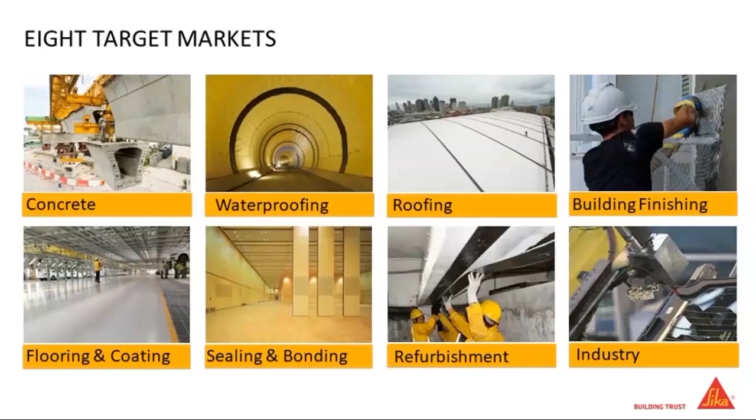So you can see we have individual specialists, but we operate as one to provide a range of support in our chosen markets. This graphic really just provides some perspective on how, as one supplier, we can really support most projects with detailed specifications, the products, the technical expertise, and the aftercare.

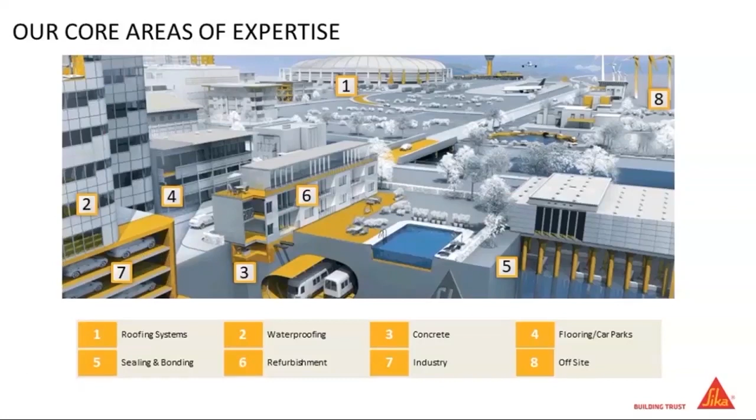So, as I said, let's move into roofing. Hopefully these market-leading brands are familiar to you and the technologies of liquid applied and single-ply membranes. And now also including the 4th pillar of bituminous systems.

Okay, let's now move through the project journey so far and a little about how recent acquisitions have helped us get here and why we choose to develop our range, including bituminous solutions.

So the first phase was to launch SikaBit Pro, our range of reinforced bituminous membranes. This was initially driven by demand in the market to complement our existing portfolio of single-ply membranes and liquid applied membrane technologies. It also provided more opportunities to match our customers' capabilities and their experience with multi-technology projects and our expertise in specification.

Launching SikaBit Pro gave the momentum to move into the next phase and to the introduction of a hot melt solution, ProMelt.

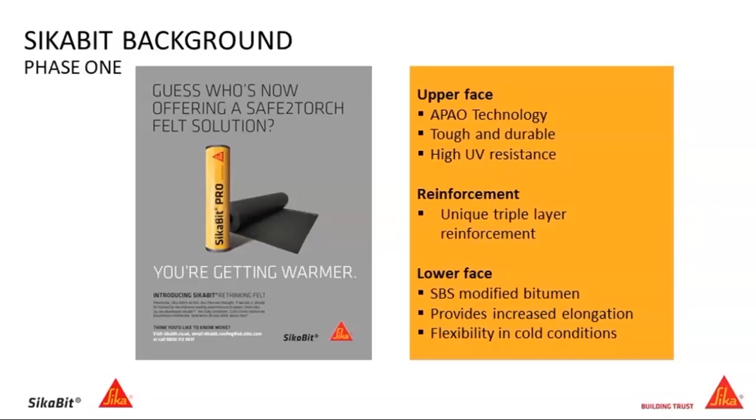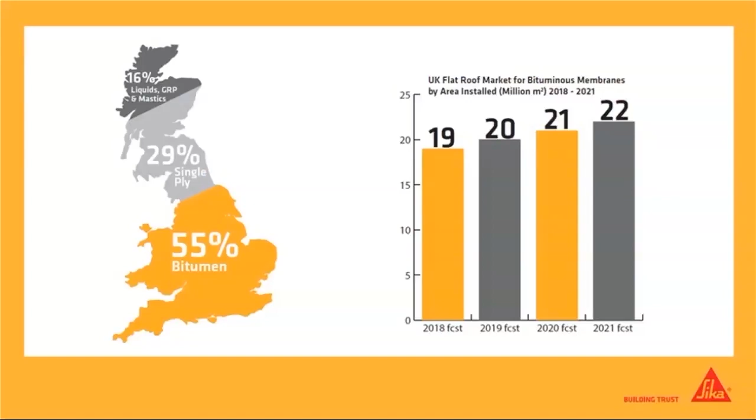Although Sika has historically pioneered the market in cold applied technology, there was still an opportunity in the mature RBM space. As this graphic demonstrates, that market share still accounts for over half of the flat roofing market. This position has been reaffirmed through the adoption of the Safe to Torch guidance across our industry from the National Federation of Roofing Contractors.

We're not strangers to bitumen roofing. For many, many years, our expertise across many countries has helped us grow. More recently, the experience acquired from these market-leading companies has allowed us to develop the solutions we focus on today.

We look at Bitbau Dörr, market leaders for over 40 years in Austria. KVK, again, market leading for a similar time in the Czech Republic. Index, who joined Sika in the last few years and boast the largest bituminous manufacturer in Europe. And more recently, Arcon in Romania.

This image gives a snapshot of our global presence for bitumen and where that experience has come from, whether it's product, specification details, or training and education. So with this wide range of experience, we could really complement our industry-leading liquid applied solutions and the range of single-ply membranes we're all known for.

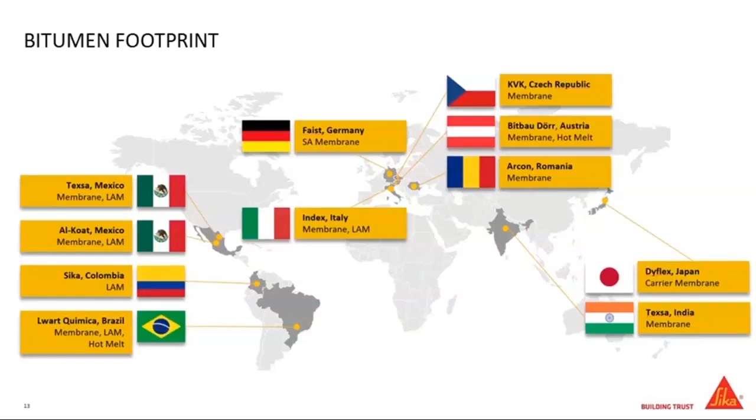Okay, hopefully this has given you all a little insight, and we can now look into the details of the products and services to support. So I'll now hand over the next section to Gavin and Fiona to take you through this.

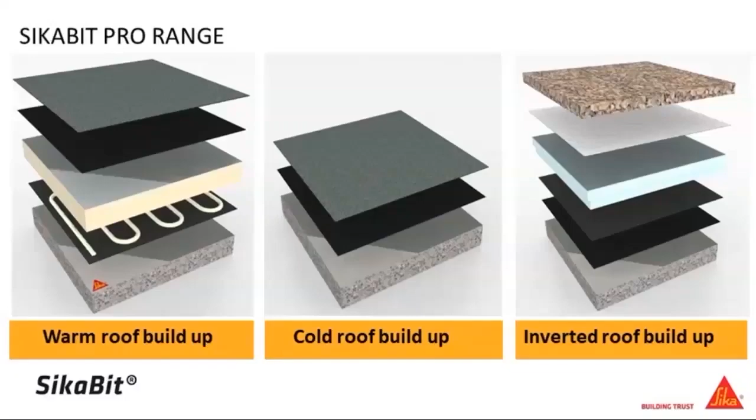Through the acquisition program that Rod mentioned, Sika has been able to benefit from the resource, expertise, and innovation that is available from the largest bitumen membrane manufacturer in Europe. This has given us a great opportunity to develop a range of systems using the latest technology and manufacturing techniques. Our range of SikaBit Pro bituminous membranes incorporate a unique hybrid technology, which is a key part of our three main systems.

These are available for a cold roof, warm roof, or inverted applications. All of our systems are specified as Safe to Torch compliant with guidance given on torch-free zones.

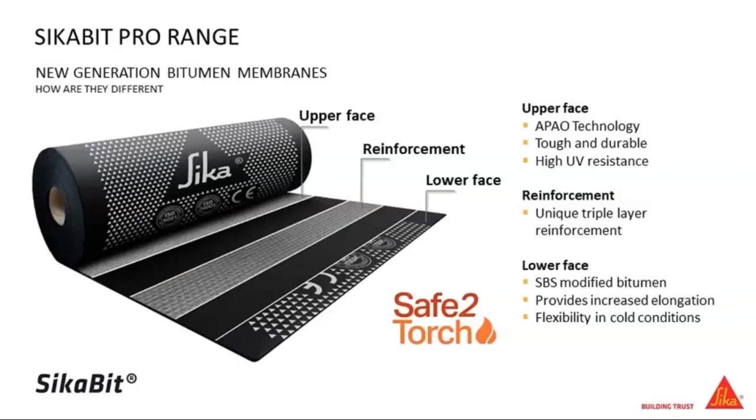Now, I mentioned previously that we have something unique compared to other systems in the marketplace, and I'd like to spend a couple of minutes explaining what this means in terms of advantageous durability and performance.

Our SikaBit Pro cap sheet is a unique hybrid membrane that combines all the benefits of two different types of modified bitumen technology, SBS and APAO. This is an industry first when it comes to this combination of technologies in the same membrane, whereas most other solutions in the marketplace tend to be exclusively one type of bitumen technology.

Now, a little more detail on how we use these technologies to our advantage. SBS modified bitumen is the most common type of specified high-performance bitumen technology, and it's generally recognized for needing less heat to apply and offers high levels of cold flexibility. For this reason, it's the type of bitumen that we have used on the bottom side of the hybrid cap sheet, where it interfaces with the SBS underlay.

Whilst SBS has excellent elastomeric properties, it isn't perhaps always ideal for maintaining its aesthetics when exposed to natural weathering over time. This is where we have a real advantage with our ability to introduce a completely different and much newer and more advanced type of bitumen technology called APAO onto the surface of our cap sheet, which offers extraordinary resistance to UV and thermal aging.

Ultimately, our ability to hybridize a membrane allows us the opportunity to offer the best of both worlds in terms of bitumen technology and ensure the highest levels of performance long term.

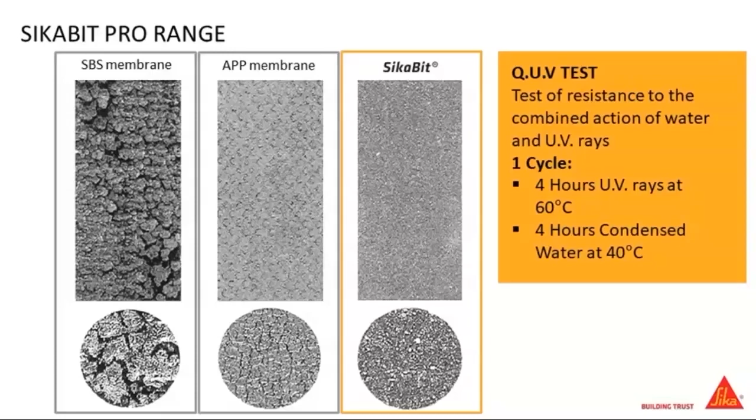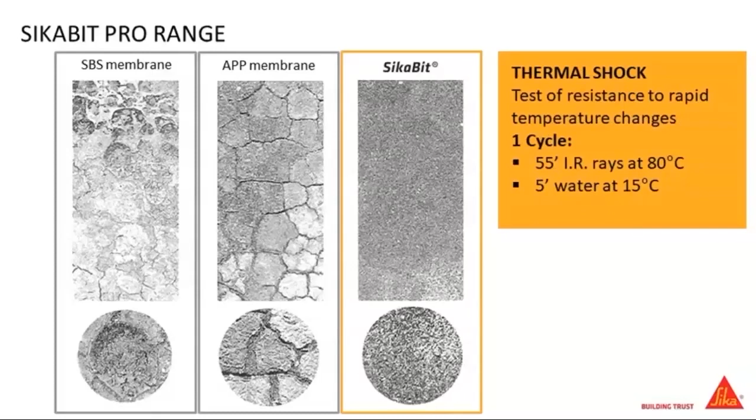Likewise, thermal shock testing, another standard test, exposes products to alternating low and high temperatures to accelerate failures caused by temperature cycles or thermal shocks during normal use. Again, our newer APAO technology, the third one along, clearly outperforms in this test too.

And to summarize this recap of our SikaBit Pro membranes before I move on to hot melt, here's an example project we've recently been working on at New Bailey in Manchester, a £650 million urban redevelopment scheme that aims to create a gateway between Salford and Manchester on each side of the River Irwell. Constructed by Morgan Sindall for the English Cities Fund, and forward funded by Legal & General, the development includes 1, 2 and 3 bedroom high-end apartments for the private rental sector.

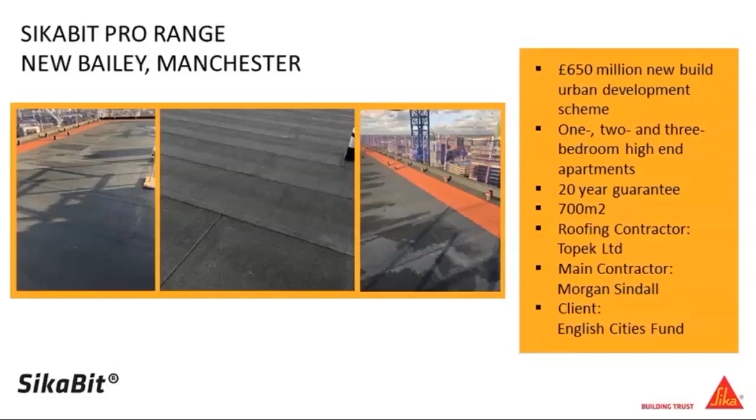So, now for the main event, and the reason that you've all kindly joined us today to hear about phase 2 of the SikaBit campaign, the launch of our brand new hot melt system. I'll start by giving you some background into our journey towards a hot melt solution, including the current market for this technology and valuable market insight that we gained in order to help us make our final technology decision.

So there's no doubt about it, hot melt remains the system of choice when it comes to inverted roofs, and the latest figures from the Liquid Roofing and Waterproofing Association suggest that this technology actually makes up 16% of the total liquid waterproofing market. Now that's the third largest segment behind polyurethanes and GRP. All available market information suggests that demand for hot melt systems is growing because it's an ideal buried waterproofing solution for flat, trafficked and inverted roofs, and at the end of the day it's economical with proven durability and legacy of use in these sorts of applications.

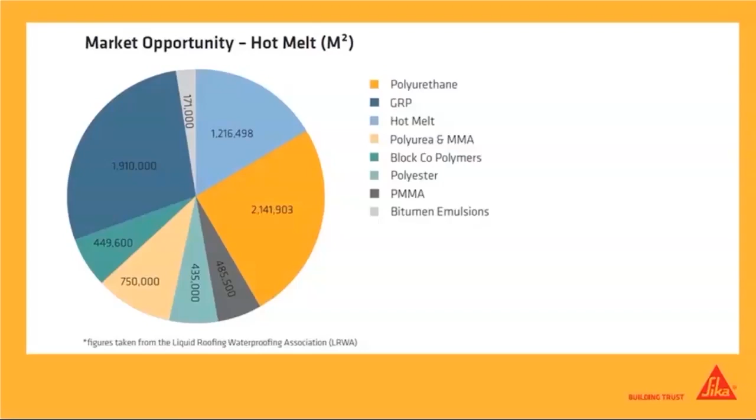Now you only need to look at the skyline of Manchester and London to see examples of inverted roofs springing up in order to facilitate extended uses such as biophilic features, and by this I mean green roofs. And I also believe that it's an increasingly frequent occurrence that planning permission is often now linked to such extended uses, including green roofs, terrace communal areas, or even blue roof systems.

And the other thing to bear in mind is that specifiers are often choosing to use a range of technologies on the same project, which may include hot melt in conjunction with, say, either single ply or maybe even felt. With a complete range of solutions now from a brand that you've trusted for a very long time, we're now able to offer the all-important one-stop shop.

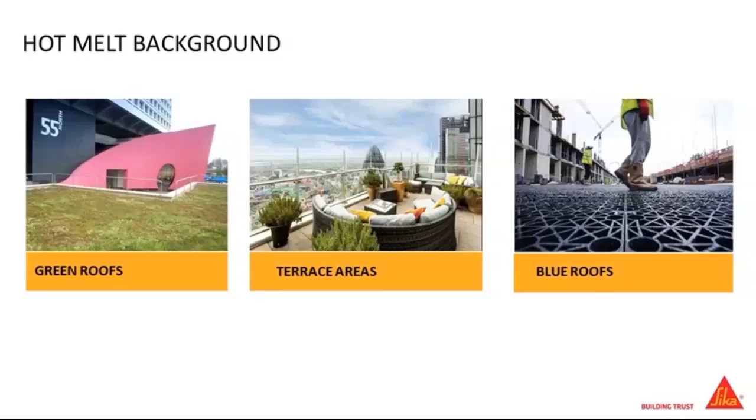And once we'd identified that there was a real opportunity for us to enter into this market, and more importantly, that there was a demand for us to do so from our installer and supplier and specifier partners, this is where the real part of the journey began. So I'm now going to briefly take you through our journey to how we ended up selecting our hot melt system and the valuable market insight we gained, which played a crucial role in this decision.

So we actually started looking at introducing a hot melt system around the same time that we launched our SikaBit Pro bituminous membranes last year. Now the reason we did this is because we had the ideal opportunity to take advantage of the fact that we had access to a lot of contractors and specifiers in a relatively short space of time, which gave us the ideal chance to canvass their knowledge and experience on hot melt and inverted systems in order to help us better understand the key issues faced when designing, specifying, or installing a hot melt system. Importantly, we were able to gain valuable insight into what hot melt technology is actually preferred and trusted by contractors, because there is more than one hot melt technology out there.

We also did some direct investigation of our own, which included site visits to watch the installation of a hot melt roof system. So out of all of the research that we undertook and our insightful engagement with some of our biggest and most influential specifiers and contractors in the industry, we highlighted two key issues.

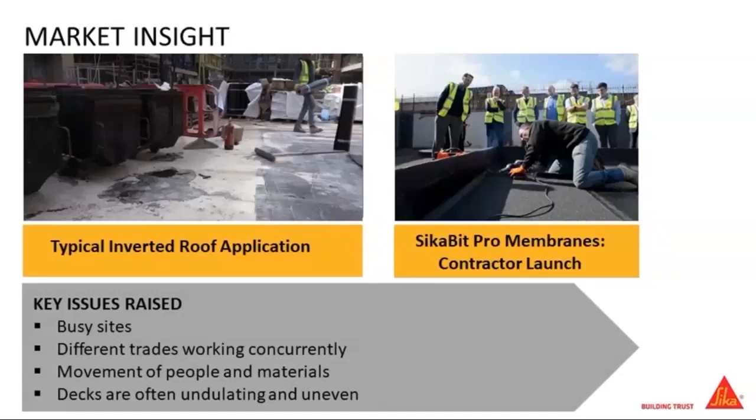Taking on board the key factors explained previously, we looked at the two hot melt technologies available to us: firstly, a traditional two-layer system with fleece reinforcement that is the industry standard for hot melt with a strong legacy of use, and secondly, a newer single-layer technology often referred to as second generation.

We found that whilst the newer single-layer systems are arguably faster to install, the opinion from the industry is that preference is still very much towards a traditional two-layer system. Contractors in particular take far more comfort in the fact that more material is laid per metre squared on a traditional system, along with its legacy of use. The evidence of its proven performance is still the most important factor in favour of traditional two-layer systems.

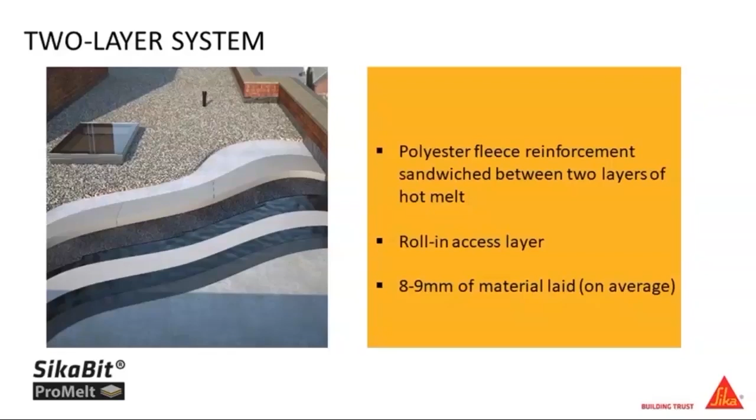Ultimately, we arrived at our key set of requirements for the system we wished to launch with three key prerequisites. Firstly, we wanted a system that was as locally sourced as possible, to give us control in terms of pricing and continuity of supply. Local sourcing also aligns with our sustainability goals, including lower embodied carbon associated with transport.

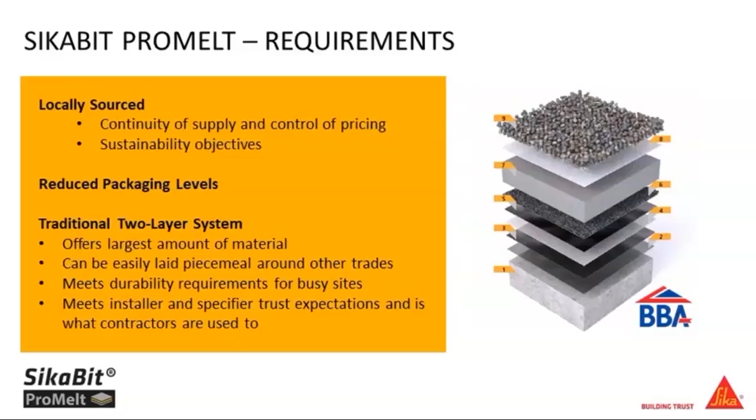Secondly, we wanted to ensure our system had as little packaging as possible, because we knew this is a growing concern on many sites. Thirdly, and most importantly, we wanted a traditional two-layer system because it offers the largest amount of material laid per metre squared of the two available technologies, can be laid easily piecemeal around other trades, meets the durability requirements for busy sites, but most of all meets installer and specifier trust expectations, which is what contractors are used to.

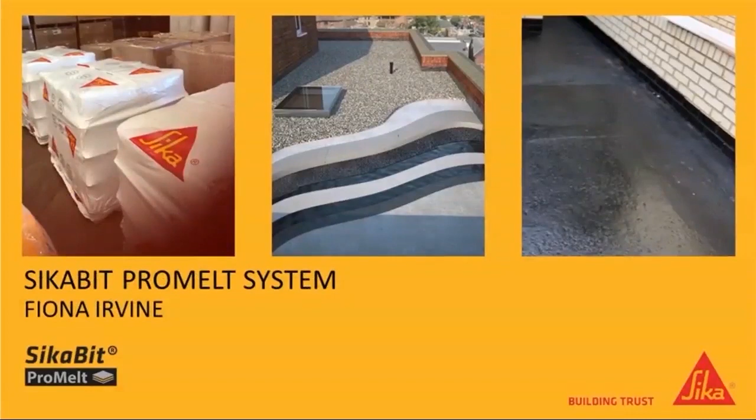I'm now going to take you through a typical inverted roof build-up of the new ProMelt system, along with some of the key benefits of the individual components within the range.

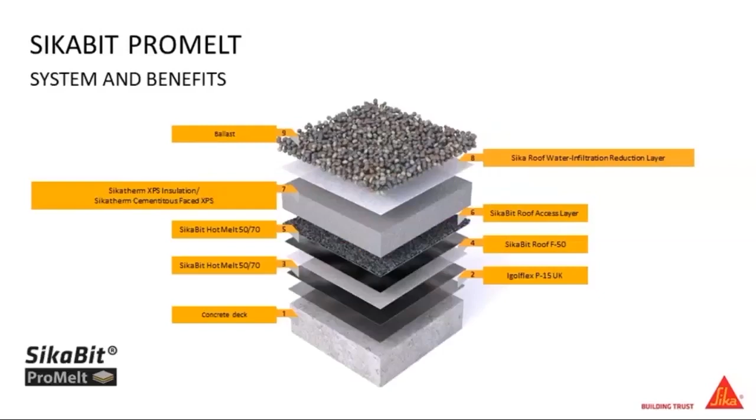The system would consist of the Igolflex P-15 UK, which is a brush or roller applied bituminous priming solution, used for the preparation of a range of substrates prior to the application of the SikaBit Hot Melt 50/70.

The SikaBit Hot Melt 50/70 is a hot applied, specially formulated combination of refined polymer modified bitumen, synthetic rubbers, lightweight fillers, and other additives, incorporating a 15% recycled content.

The traditional two-layer system has the SikaBit Roof F50, a reinforcement fleece embedded into the first layer of the hot melt compound, followed by a second layer shortly after.

As soon as the second layer of hot melt compound is applied, the SikaBit Roof Access layer, which is a sand surface SBS modified membrane, is applied as a protection layer.

The build-up is completed with our range of SikaTherm XPS insulation in conjunction with the Sika Roof Water Infiltration Reduction layer, prior to finishing with the ballast or paving as per your project requirements.

To touch on some of the benefits of the individual products in the ProMelt range: the SikaBit Hot Melt 50/70 has outstanding durability with a monolithic application and is fully bonded and non-tracking. The blocks themselves are wrapped in a thermofusible film which goes into the cooker, removing the need for individual cardboard packaging and reducing on-site waste.

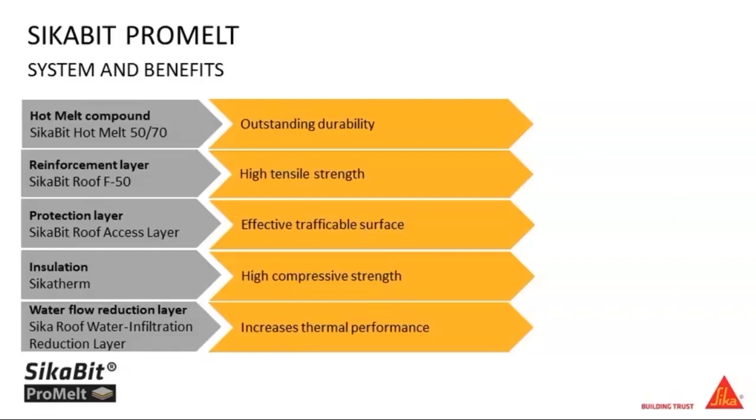The SikaBit ProMelt system is fully BBA certified for use in inverted and green roof scenarios for flat roofing, including zero falls, and has a durability statement for the design life of the roof in which it's incorporated, while achieving an unrestricted fire rating.

As part of the wider ProMelt range of products, we have various different access layers available, be that for exposed upstands and penetrations, or green roof build-ups, along with a range of accessories, including outlets, roof lights, and trims.

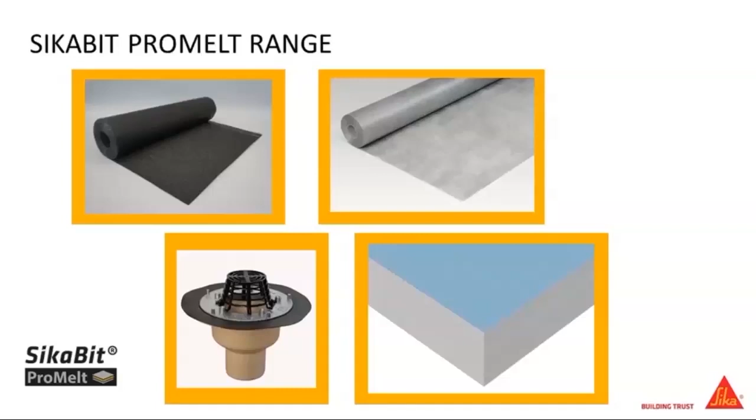Now that we've been through the market and the SikaBit ProMelt system, I will briefly take you through some of our key service elements you can expect as part of your Sika experience.

At Sika, we have a quality management system in place so that we can support our customers throughout their engagement with us. This takes us from the start of your project through to the installation, final sign-off, and aftercare.

Our external and internal roofing technical teams already offer a whole host of services for designers, specifiers, and contractors to provide support for the increasing range of Sika's roofing products and technologies.

As shown here, we'll continue to offer the same outstanding support for the new ProMelt range as we do the existing brands. This will include a consultation with our experienced area technical managers, bespoke project specifications, technical advice and guidance, and supporting technical literature.

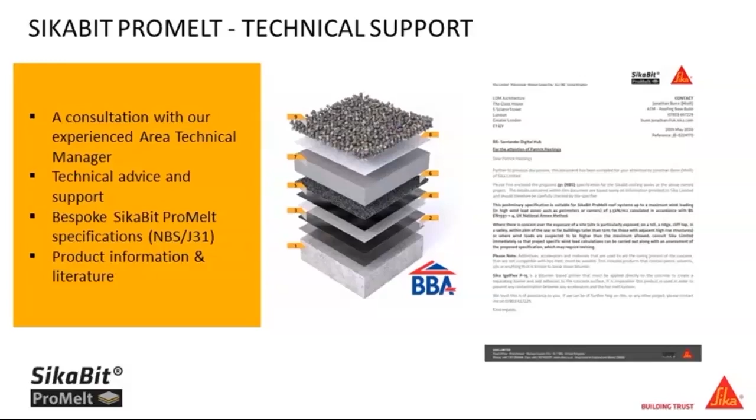Our service would also include product information, so data sheets or BBAs, standard details and advice, project-specific design support, thermal calculations, and also coming soon we'll be providing drainage calculations.

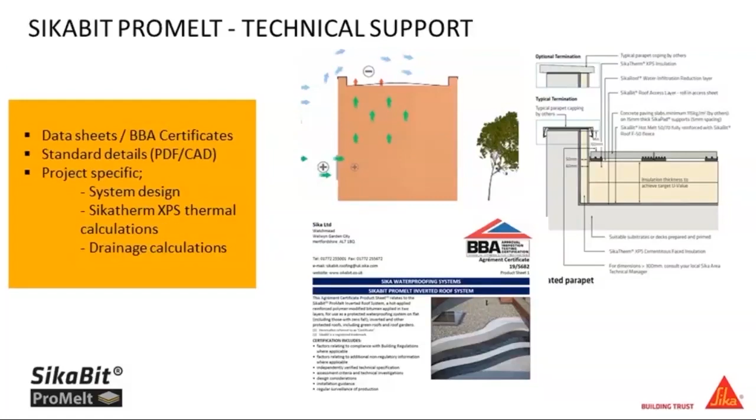At Sika, we utilise a custom-built specification system which we call Spec Manager. This combines a cloud-based project database and a mobile specification and inspection app.

The mobile data allows project information to be input onto the app by the Sika Area Technical Manager in real time, be that during a roof condition survey or discussions at design stage with architects and specifiers, all via their mobile device. The app is then synchronized with the Spec Manager where the project can be managed.

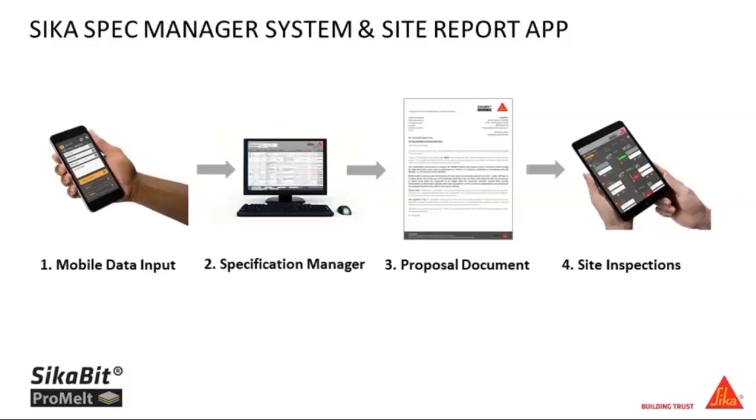Our technical services teams can then check the proposals and produce a bespoke specification. The information feeds into the site inspection app, which is customized for the technology specified, giving our team of field technicians access to all project information when carrying out inspections.

For the installation of the new ProMelt range, like all our systems, we will be using a national network of SikaBit ProMelt contractors. Our training course, which will be run at our training academy in Preston, combines theory, demonstrations, and a practical application workshop to give installers hands-on experience of the new SikaBit ProMelt range.

Our applications team provide a range of services, including training, site inspections, on-site support, and guarantee inspection. Our site visits are conducted by our national team of roofing field technicians who are specialists in single-ply, liquid-applied, and bituminous membranes.

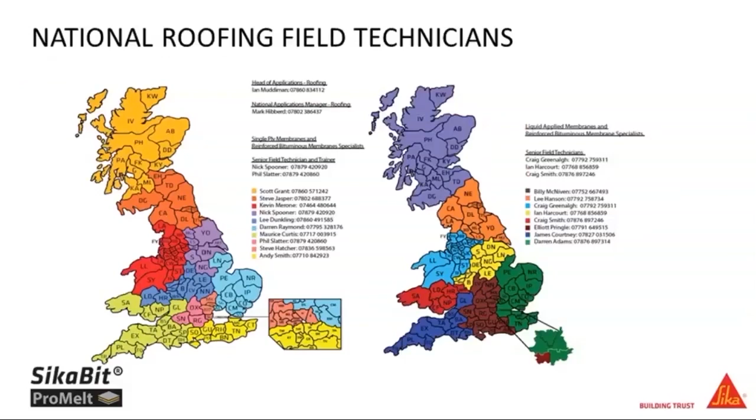To provide you with an overall snapshot of the support our applications team provided to our customers, here's an infographic depicting the site inspections and trainings that we provided in 2019, which I'm sure you'll all agree is an impressive feat by our applications department.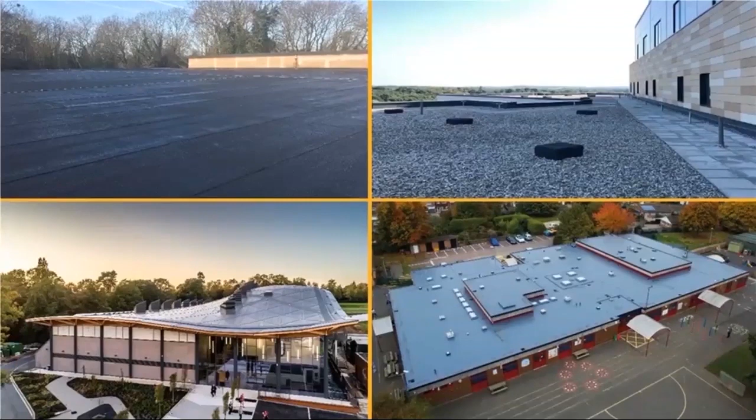Thanks, Fiona, and thank you to all our team today. I'll now just summarise what we believe are the key points from today's presentation.

Our capability in roofing and other markets is clearly proven. The existing solutions we have now been complemented with the addition of RBM and now hot melt. The benefits to have this wide range of solutions are also clear.

Certainly from our expertise in supporting the designer or specifier, advising on technical queries or site support, and whether you're building or installing a roof. A true one-stop shop, which is where one guarantee for everything, when required, is possible.